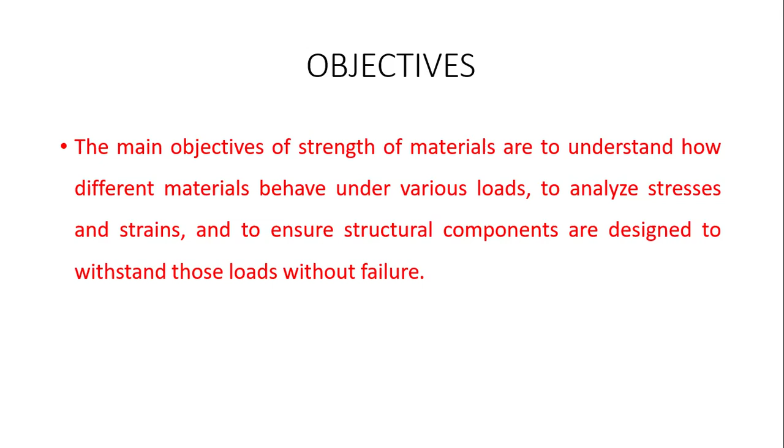What are the basic objectives of strength of material? So mainly this subject helps to explore a lot of things from the material point of view. So engineer has to select different material relative to the corresponding engineering applications and also involving in analyzing, testing various types of loads which are acting on different structural components and studying the rigidity of the various structural components by withstanding those loads without failure. So with this information, we will move further to the remaining segment of discussion.

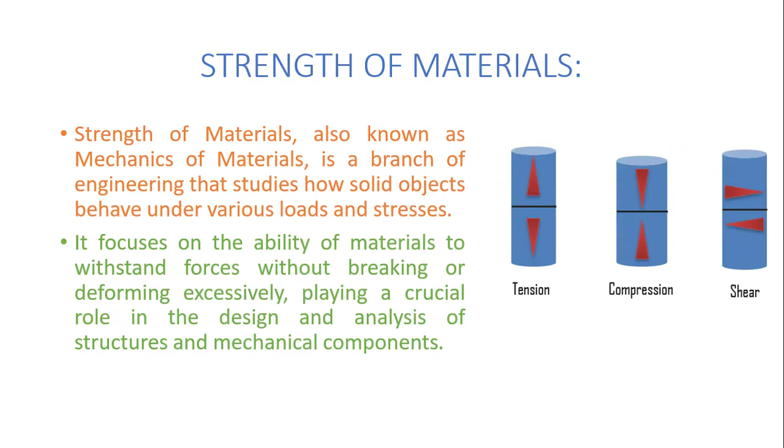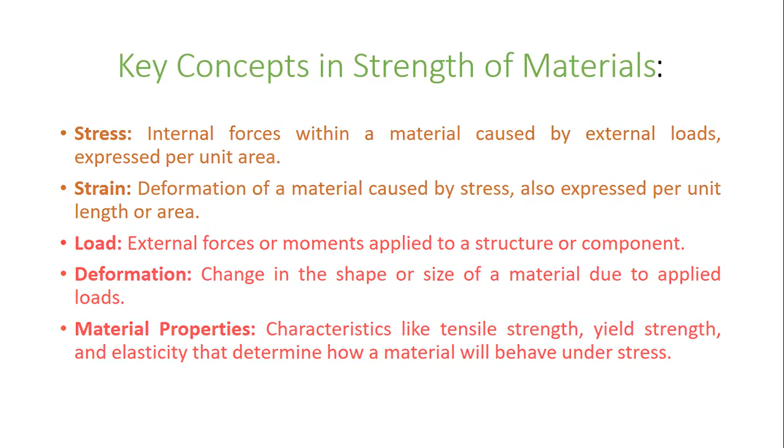Then selecting appropriate material, suitable material for specific application. So choosing the right material for the component based on the strength, flexibility and other supporting properties. Predict the structural behavior under load, analyzing how the structure gets deformed or failed under different conditions.

So now I conclude the overall information based on the previous slides. So as an overall, strength of material provides the basic tools and knowledge by ensuring that the various structures and components can withstand the forces that they will encounter for their intended usage.